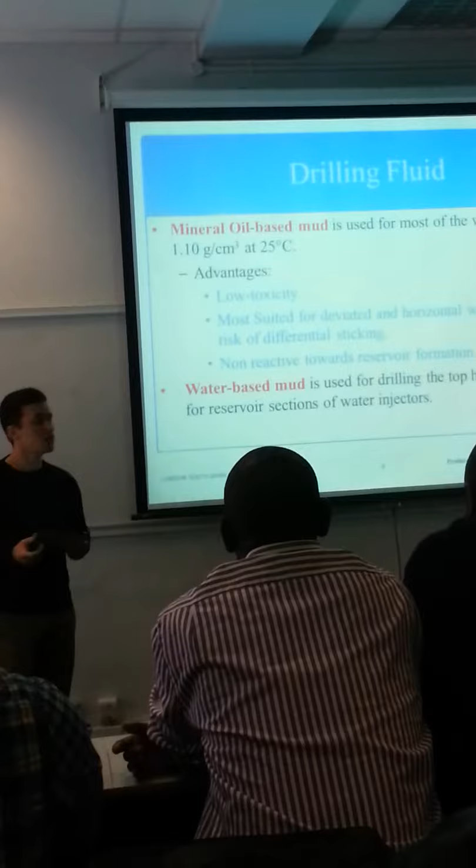In the Girasol field, mineral oil-based mud is used for most of the wells, where the density is 1.1 gram per cubic centimeter at 25 degree centigrade. The advantages of using mineral oil-based muds are low toxicity, and it's most suited for deviated and horizontal wells, reducing the risk of differential sticking, and lastly, being non-reactive towards the reservoir formation.

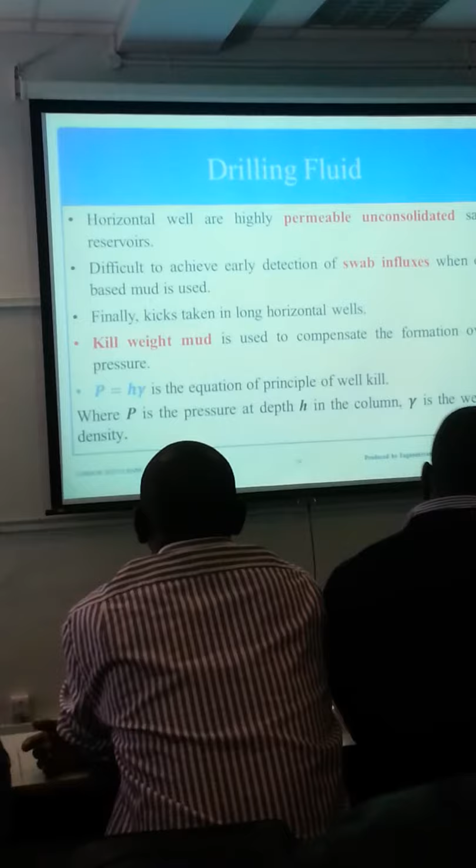However, water-based mud is also used for drilling the top hole sections and for the sections of water injectors. Most of the horizontal wells are highly permeable unconsolidated sand reservoirs, and because of that, it's difficult to achieve early detection of swab influxes when oil-based mud is used.

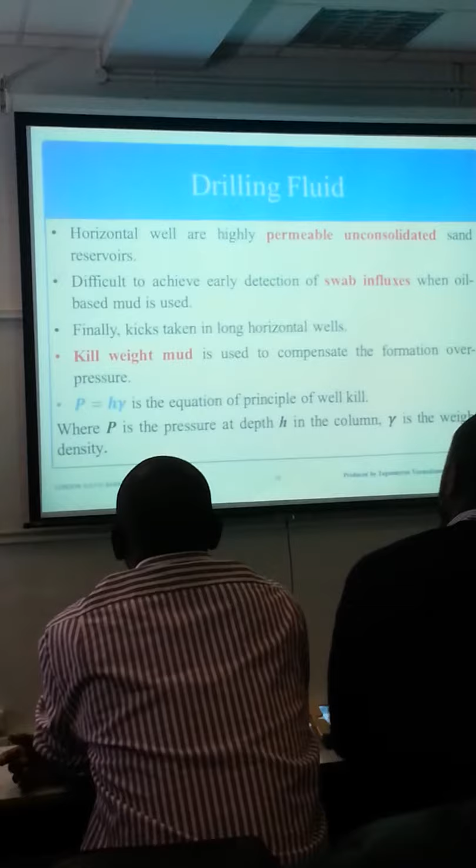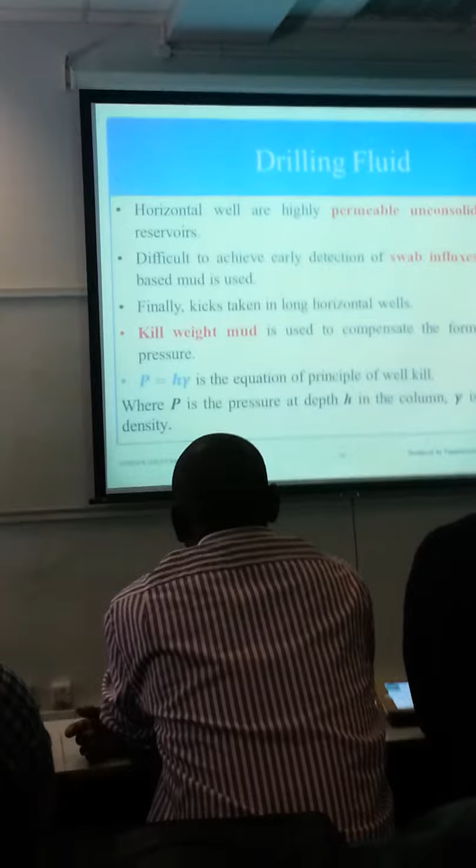And finally, kicks took place in the long horizontal wells. To overcome that problem, kill weight mud is used to compensate the formation overpressure. This is the general equation used as the principle of the well kill, where P is the pressure, H is the depth of the column, and gamma is the weight density.

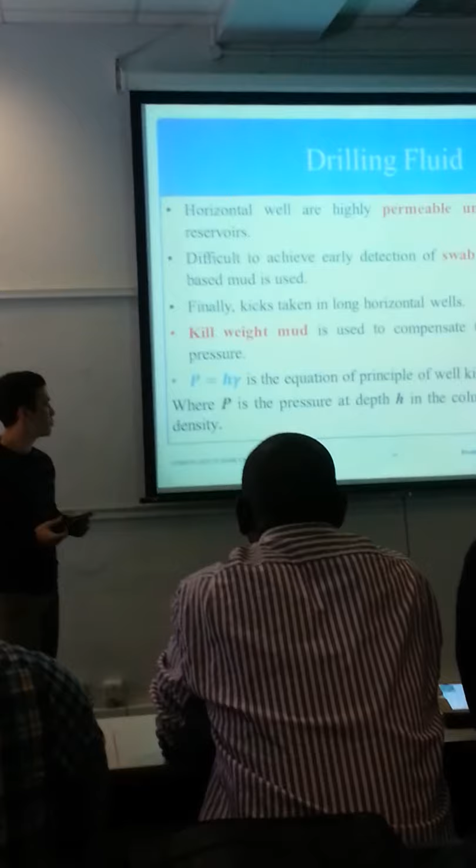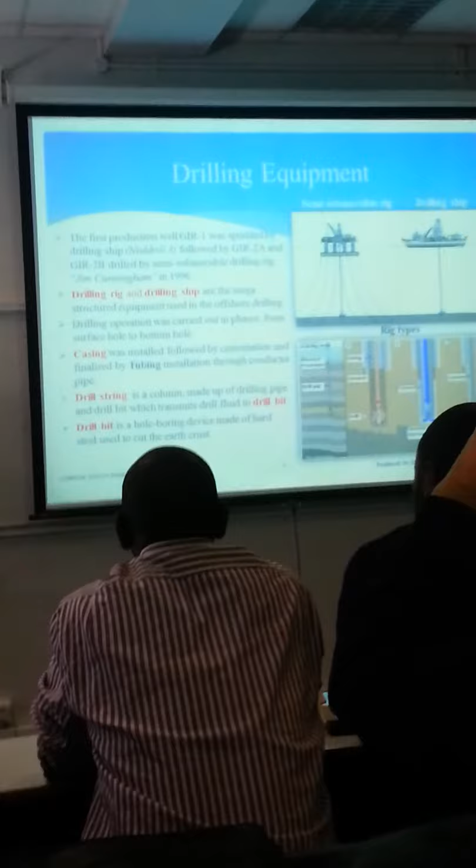Ladies and gentlemen, I'll speak about the drilling equipment used in the Girasol field. There are many thousands of equipment used in the drilling process, but I will go through some specific ones, the ones which are very important and mega structures.

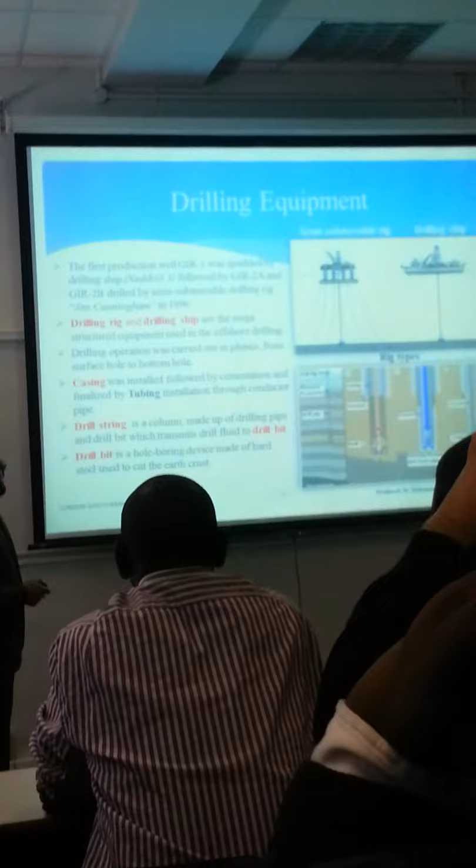First of all, for any drilling operation, a platform is needed, either offshore or onshore. The field is located offshore, in deep sea. So it is recommended to use the drilling ship, which you can see here, because it's located 6,000 feet down. After that, they use the semi-submersible platform, which is shown here. These are the two mega structures and equipment used in the drilling process.

After that, when the drilling took place and began, the casing is the most important element of equipment used in the drilling process, which is given here in detail. Casing is installed as a circular pipe, followed by cementation, to prevent the well from the inflow of other liquid.

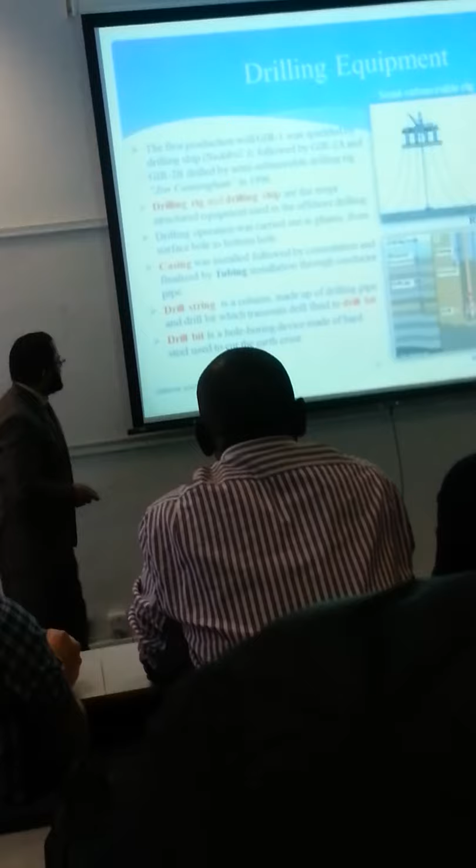And the second thing is the drilling string. The drilling string is a column made up of drilling pipe and drilling bit, used to transmit drilling fluid to the drilling bit.

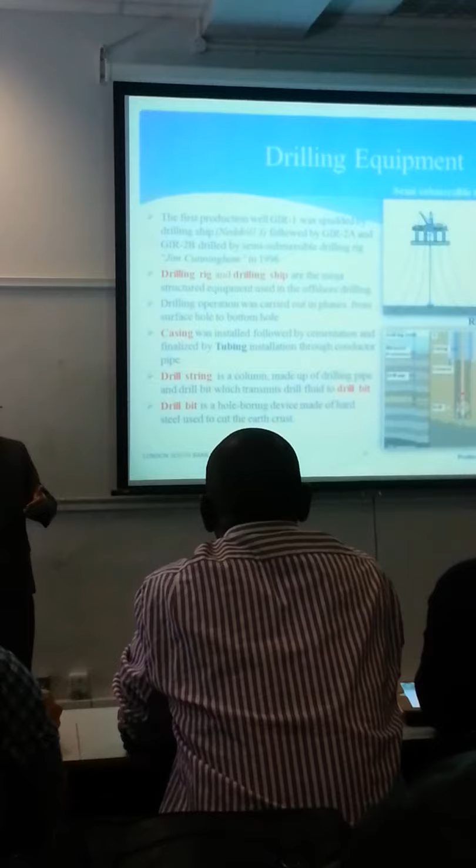And the next one is the drilling bit. The drill bit is a hole-boring device made of hard steel, used to cut through the rock. It depends on the structure of the earth and how hard or soft it is.

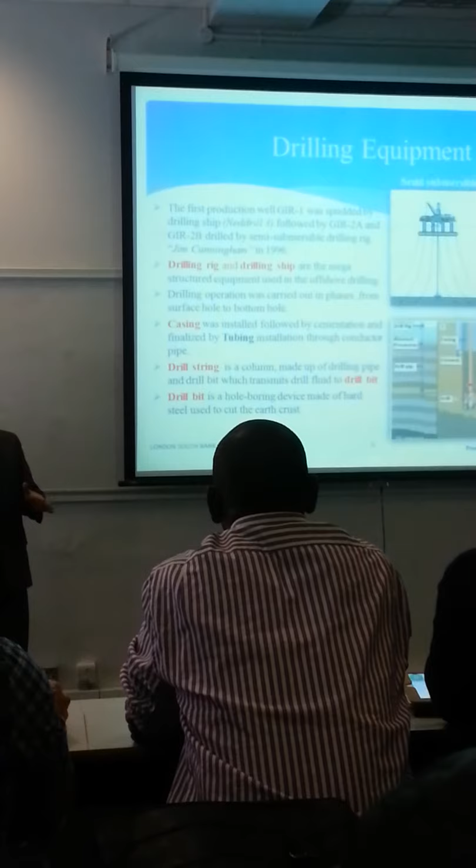And to keep the drill bit cool, the mud circulation system is used. This is the mud circulation system, which is given here.

Above this, there's a blowout preventer, which is very important equipment used in operations, because it controls the unwanted inflow of hydrocarbon in the field, which is given here. This is the hydrocarbon.

And the other thing is the drill collar. The drill collar is a thick wall made of steel, used to give heavy weight and mass to the drill bit, to push it down. Thank you so much. I'll request my colleague to come up.

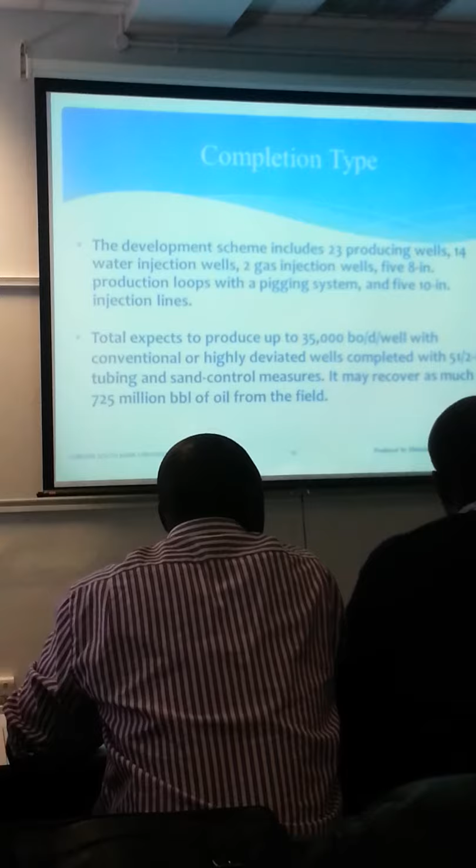The Girasol development consists of 23 producing wells, 14 water injection wells, 2 gas injections, and 5 8-inch production loops and 10-inch injection lines.

According to Total, a production of up to 35,000 barrels of oil per day is expected, with highly deviated wells completed with 5.5 inch tubing and sand-control measures. The recovery is expected to reach 725 million barrels of oil from the field.